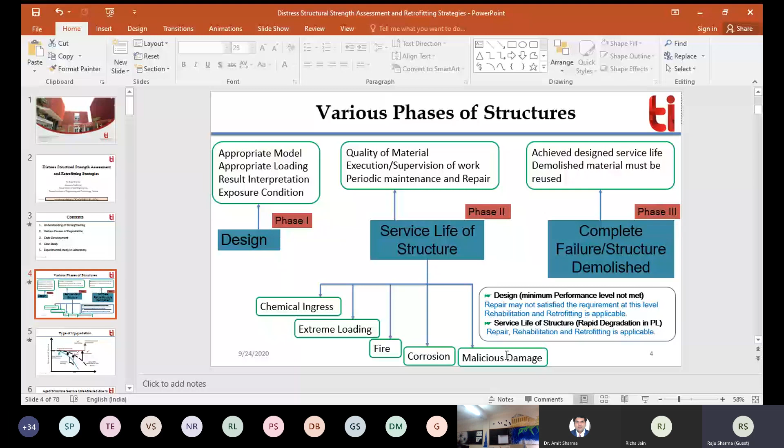Let me make my screen full mode. So here you can see that the life of a structure significantly depends on the quality of materials you are using at the site, the execution and supervision of the work, and periodic maintenance and repair. Sometimes you designed well and took everything good, but at the site the execution and supervision was not up to date, and because of that, whatever was the expectation from the structure was not met. This happens generally.

Because of these actions through the environment or other things, your rate of degradation rapidly increases. So in this particular phase, it is very important for the structural engineer to take care of the structure as required. Now next is complete failure, structure demolished.

It is good if your structure achieved its complete service life, complete design life. Then it is good. And nowadays sustainable construction practices and sustainable development goals are a priority for every nation.

So the demolition waste must be reused and recycled, because there are 17 sustainable development goals developed by the UNO, and it is the duty of all countries to follow them. More than 70% of them are related to the construction field. So it is our duty to use these materials in a beautiful way without compromising the structural property.

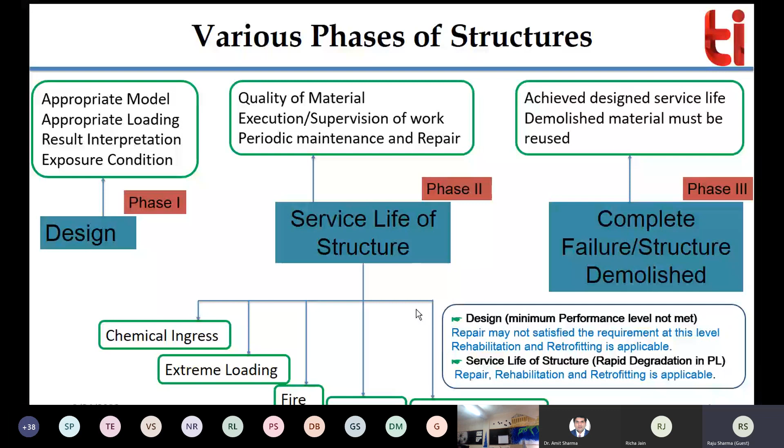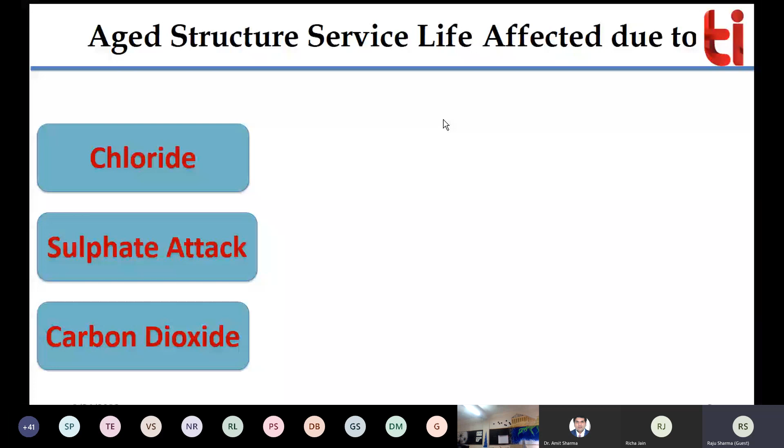Now we will see some aged structures which are subjected to service life, which are subjected to various kinds of actions like chloride, sulfate attack, carbon dioxide, shrinkage effect, alkali silica reaction, corrosion, improper construction practices, and other types of degradation. We will try to cover all these aspects, because as an engineer and retrofitting practitioner, you have to have the skill to identify the degradation first, and then based on that degradation, apply the cure to the structure. So we will discuss one by one.

This is the chloride induced corrosion map of India. You can see the blue line, which shows the coastal line of India at the bottom of this map. Just above that, you can see this line showing extremely severe conditions, on the right side top corner, that color showing extremely severe.

This coastal line is almost 7,000 kilometers, and many structures are constructed nearby this line. As you move above on the map, you will encounter severe corrosion, the area subjected to severe corrosion because of chloride. Moving further up is moderate, then mild, and then negligible. So at the top of this map, there is a negligible kind of environment in terms of chloride effect on the structure.

So structures constructed nearby the extremely severe zone need to be protected from chloride. Although carbonation also takes place there, effective carbonation may occur when you have humidity between 60 to 70%, and a temperature within some range. Then only carbonation will take place in this area, but chloride significantly affects it.

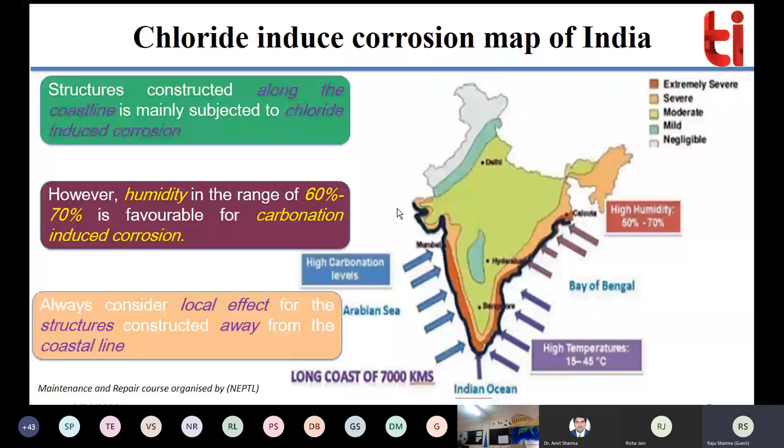Next is the service life of structure exposed to chloride. On the y-axis you can see the damage level, on the x-axis the exposure time. In the center you can see this particular member showing a concrete member, with the top surface intact with the atmosphere. So the chloride ingresses through the surface, and this red dot shows it transferring from the top surface to the black dot, which shows the reinforcement.

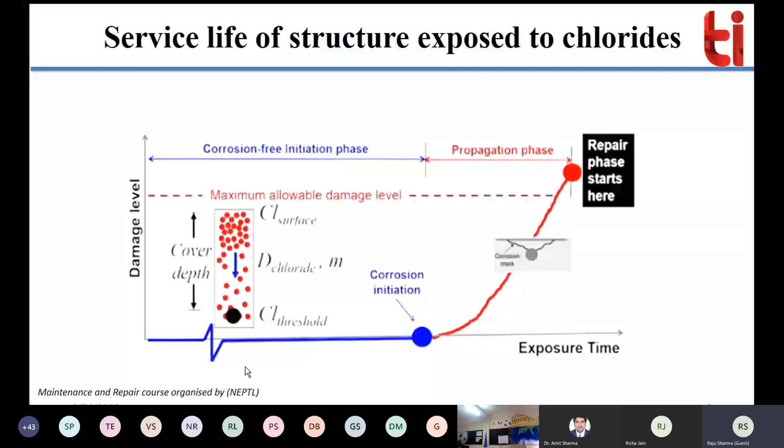When the chloride approaches the reinforcement and reaches the chloride threshold value, corrosion will start. On the x-axis, the blue line shows there is no corrosion, meaning a corrosion-free initiation phase. But once chloride reaches the threshold value, from that point the propagation of corrosion starts, and cracks due to corrosion may take place in the member. Then a repair phase starts from the point when it goes above the maximum allowable damage level.

Now this is the image. Just by seeing the image, it is very difficult to understand what happens. It shows that the concrete paste is completely removed, completely eroded, degraded, and some kind of appearance comes up on the surface, and this is not a pleasant look from the structure. So lots of aggregates you can see, meaning the cement paste is completely degraded and removed from there, and it happens because of the sulfate.

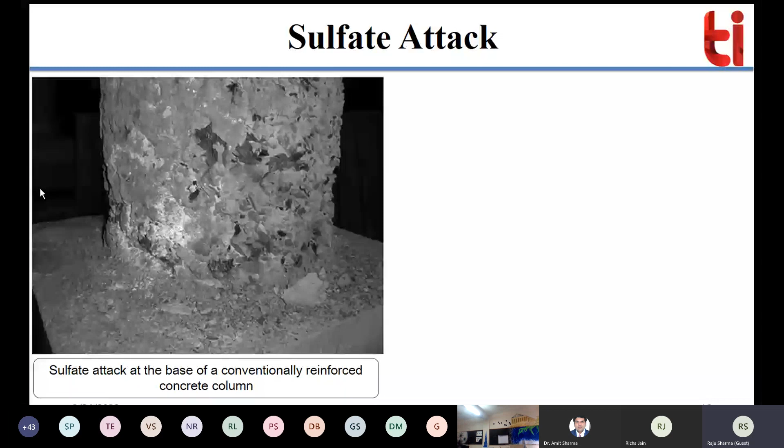To measure the sulfate, you have the ACI 318 building code for concrete which describes different levels of sulfate. Sulfate ions are present in the groundwater, in the soil, in the rainwater, and if the level of sulfate keeps on increasing, its effect on the concrete structure also keeps on increasing, resulting in spalling, cracking, degrading, and other failure. There are 4 types of different stages of sulfate described by the code: negligible, moderate, severe, very severe.

Now it is very difficult to identify the cause of this particular appearance on the structure. So what is the one method? I will tell you how you can scientifically evaluate this particular kind of degradation, how you can find out the reason for it. This is one method I will show you.

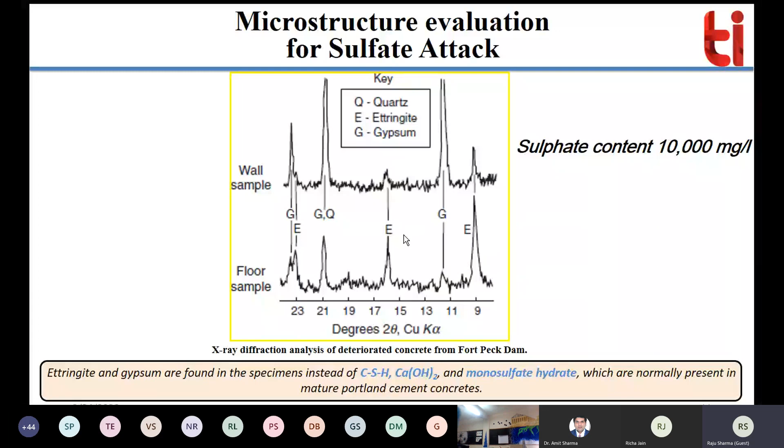In this particular concrete sample, you found those particular minerals which are closely associated because of the sulfate attack, because of the sulfate ions. It shows that your concrete is severely affected from the sulfate, and because of that, degradation happened on this wall and on the floor. So this is one way you can correlate microstructure testing evaluation with the large scale failure of the structures.

Now, next is the shrinkage effect. This is one of the important things. This image shows the surface having some cracks which are oriented in one direction.

If I say how this plastic shrinkage happens: if the surface area of the structure is very large as compared to the cross section, the surface is exposed to the atmosphere, the air, the sun rays. If it is too hot, the water starts evaporating. If the rate of evaporation of water is too high as compared to the rate of movement of water from beneath the slab to the top surface, meaning the bleeding of water, then the water will not reach the top surface appropriately, and the top surface gets dry. At that point the shrinkage starts.

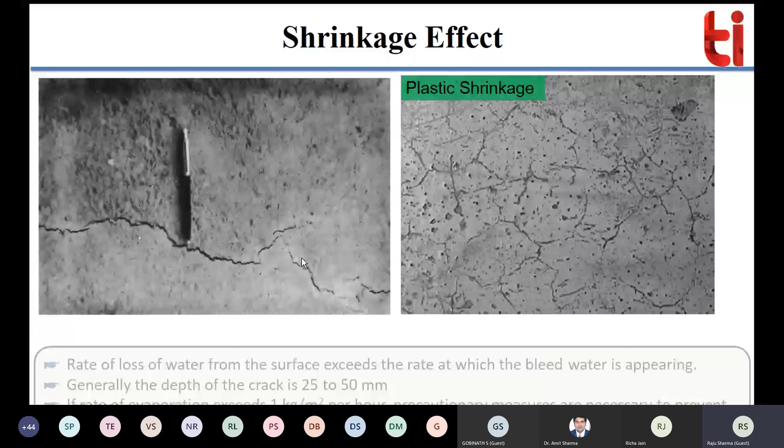If you see this closely, you can see this kind of cracks on the slab because of the plastic shrinkage. The rate of loss of water from the surface exceeds the rate at which the bleed water is appearing. Generally the depth of crack is 25 to 50 mm, and if the rate of evaporation exceeds 1 kg per meter square per hour, precautionary measures are necessary to prevent plastic shrinkage cracking. So this is the shrinkage effect.

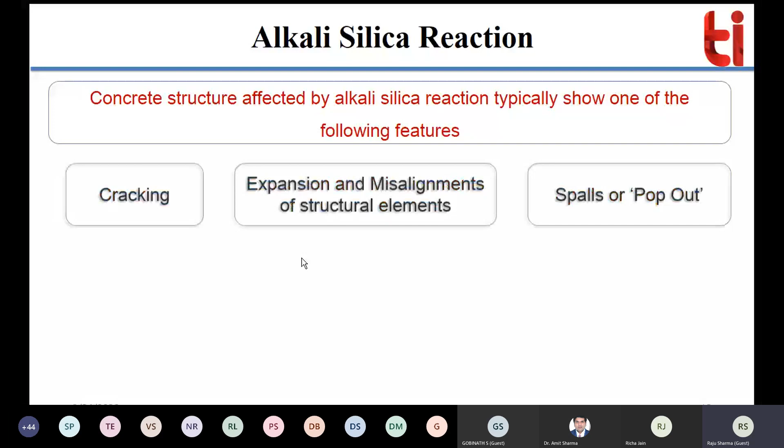Next is very important, the alkali silica reaction, which takes place in concrete structures because of the reactive silica present in the aggregates reacting with the alkalis present in the concrete. The following things may happen because of alkali silica: cracking may happen, expansion may happen, misalignment of structures may happen, and spalls or pop out may happen.

If you see the map, there is cracking formed on the surface, and it will be irregular polygons with boundaries reminiscent of political boundaries on a map, which generally shows map cracking. It shows the map, meaning a political map, on the concrete structure, which is what we call map cracking.

Unfortunately, all three of these effects are not specifically tied only to alkali silica reaction. Some things may happen specifically because of this, but simultaneously there might be other factors also which accelerate that kind of failure.

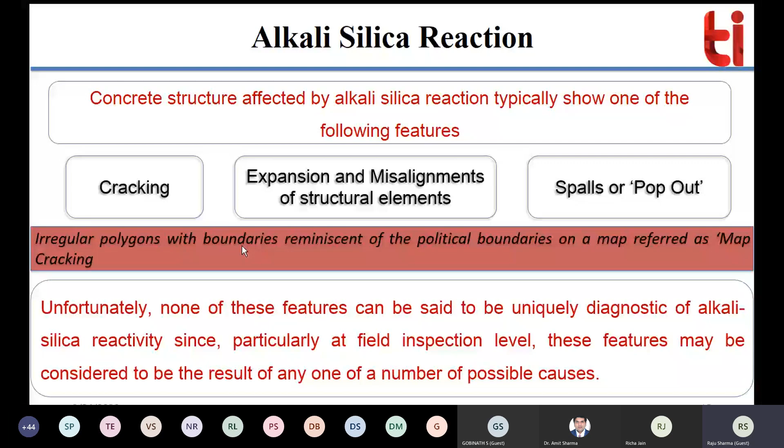I will show you one image of the floor, taken from Cape Town, and it shows a number of cracks which are randomly distributed and connecting with each other. It is nothing but a kind of random pattern on the slab, which we identify generally as map cracking.

If I show you this right side image, taken from the Mott MacDonald test exposure site, Devon, it is a column structure, and that column is not showing map cracking. Here is the map cracking, but here there is no map cracking. There is a vertical crack just propagating in the direction of the stresses, as this arrow shows.

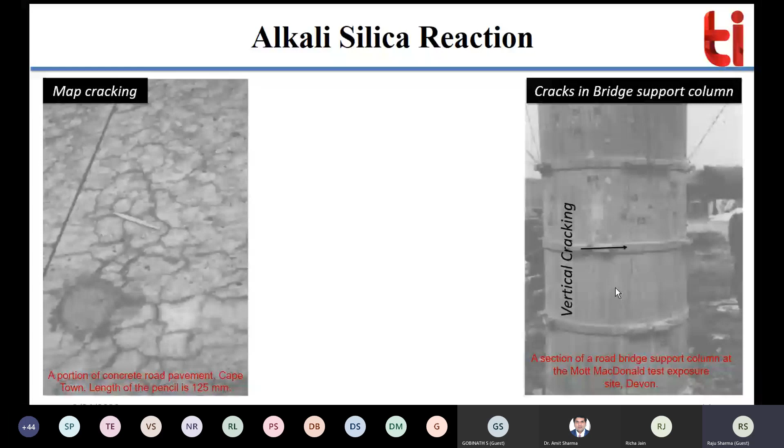Now if concrete is under pre-existing stress, if there is a stress applying on that particular structural element, then if that structure is affected by alkali silica, it may not create map cracking. It may create cracking which propagates toward the direction of the stresses. Now, what they did is they cut this particular section from the structure itself.

They removed this section so that the stresses acting on it were completely removed, and they placed that structural element somewhere else. Then they found that instead of cracking in the vertical direction, random cracking in a map-like pattern started to form.

So what does that mean? It means that if your structural element is not subject to stresses and is affected by the alkali silica reaction, that will create map type cracking. But if that structure is subjected to stressing, it will not create map cracking, but instead create cracks running along the direction of those stresses.

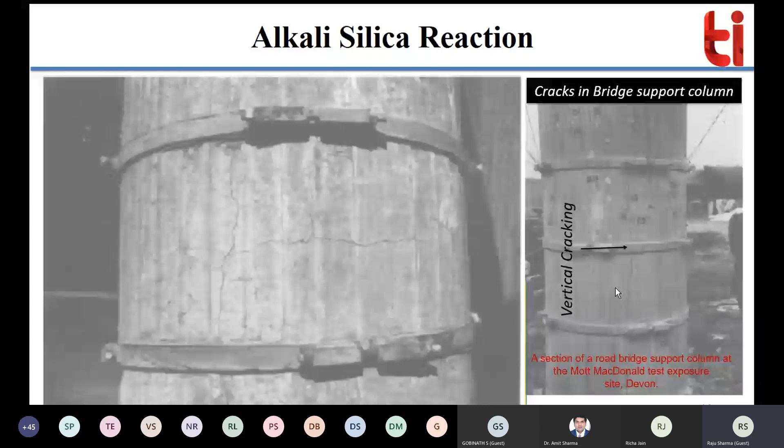So this is the difference between the alkali silica reaction identification types. Now this is the pop out. In the pop out, you can see this particular aggregate, shown in white color, and it just breaks because of the alkali silica reaction.

When this reaction happens, an expansive gel forms very close to the surface of the concrete, and that gel is very expansive. That creates pressure which keeps increasing and expanding, and then the pop out happens in the aggregate.

This is another image showing this aggregate. They found this is a category of chert particles which generally have high alkalis, and because of that, this kind of cracking may appear on the surface. So this is the alkali silica reaction.

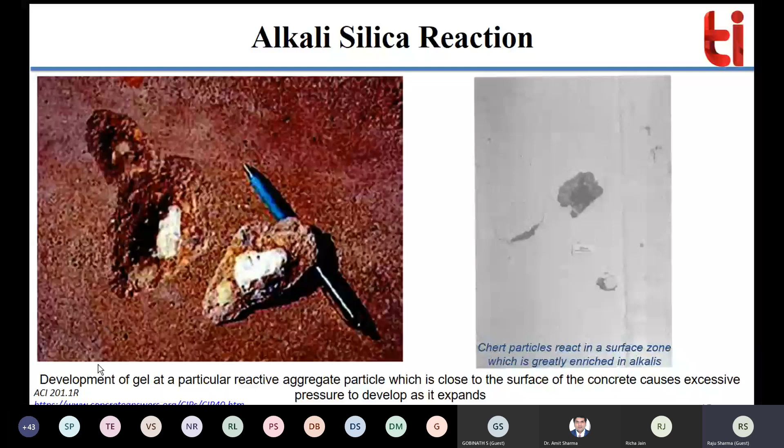Now we will see corrosion in the reinforcement. We will go through the basics first and then move to the advanced topics.

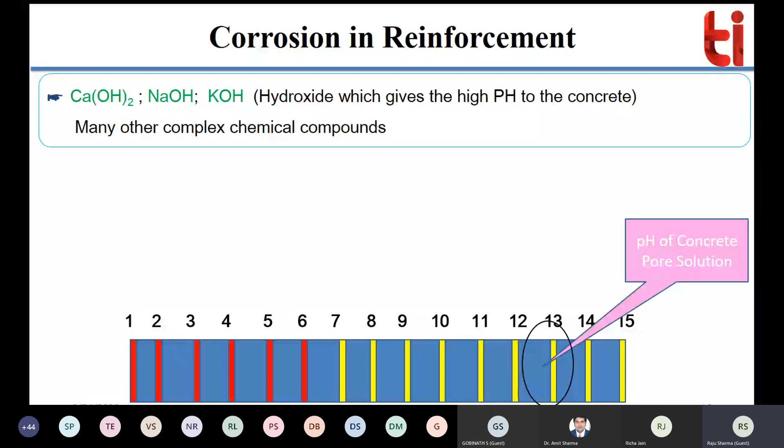On the lower side you can see the pH scale, showing pH values from about 1 to 15. Your concrete has many compounds inside, such as calcium hydroxide, NaOH, and KOH, and because of those compounds the alkalinity of the concrete is very high. If your concrete has high alkalinity, generally around 13, that is the pH of the concrete pore solution. If you measure the pH of concrete, it may lie near 13 to 13.5, and because of this high pH value, your reinforcement is safe inside the concrete.

Now let's divide these two terms: acidic and alkaline. Something happens in the concrete when it is in service, and because of that the alkalinity is reduced - that is basically corrosion. Corrosion takes place when you have oxygen and electrolyte in the concrete, along with chloride or carbonation. If something is not there, corrosion will not take place, but unfortunately it cannot be controlled that way. So the presence of oxygen, electrolyte in concrete, and chloride or carbonation creates corrosion inside the concrete.

That process actually creates the corrosion. What happens inside the concrete is that the pH value decreases towards the acidic phase, and if it goes below 9, corrosion takes place. That starts corrosion, and therefore corrosion occurs.

If I visualize this, this is the reinforcement, and under high pH value you have a protective layer, like a protective coating on top of the reinforcement. When the pH value decreases, this protective layer starts to diminish. Once it diminishes, the reinforcement starts exhibiting corrosion. So this is the basic fundamental process of corrosion.

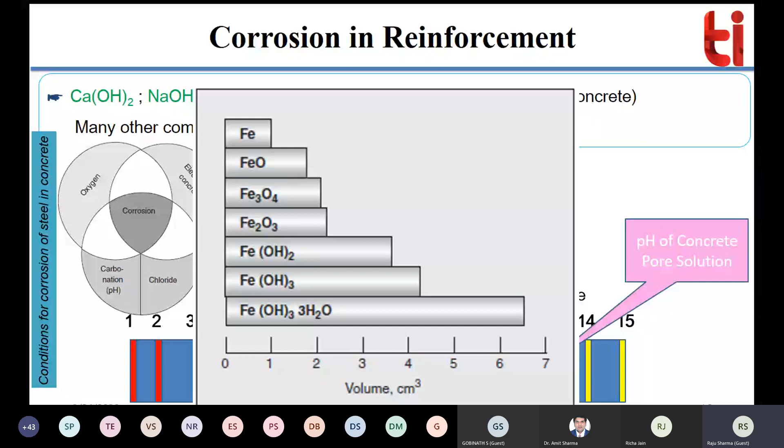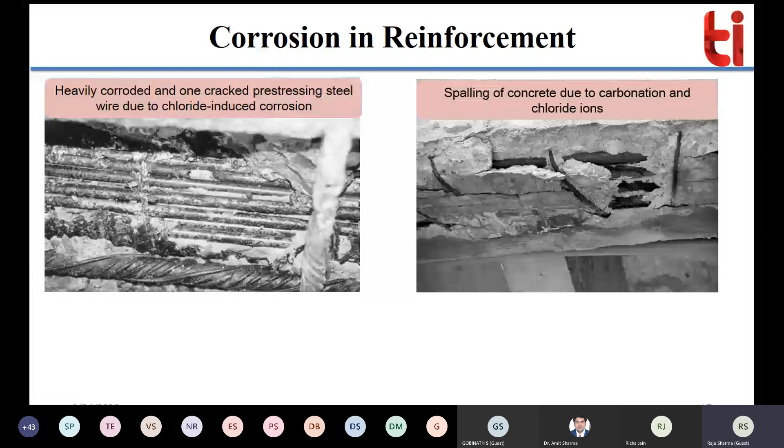Completely cracked, and it happens due to chloride-induced corrosion. And the second image shows spalling of concrete due to carbonation and chloride ions. This might also indicate improper construction practices - you can see the placing of the stirrups in this image, which is not appropriate. So we need to understand these two things: pitting, and this particular damage due to carbonation.

So in general, corrosion in carbonated concrete results in early cracking and spalling of the concrete, and it happens uniformly. But localized corrosion happens due to chloride ions - chloride ingress at a particular point - which affects the reinforcement from one location, reducing the cross-sectional area of that reinforcement.

If you see this larger image, you can see pitting corrosion on the left side, where this reinforcement is severely degraded. This reinforcement is related to pre-stressed wire - these are pre-stressed tendons. So in pre-stressed tendons, cross-sectional area loss has happened because of pitting, and you know this reinforcement is always under stress. Once it's always stressed, the reduction in cross-sectional area may result in brittle failure of the structure. So pitting corrosion must be avoided.

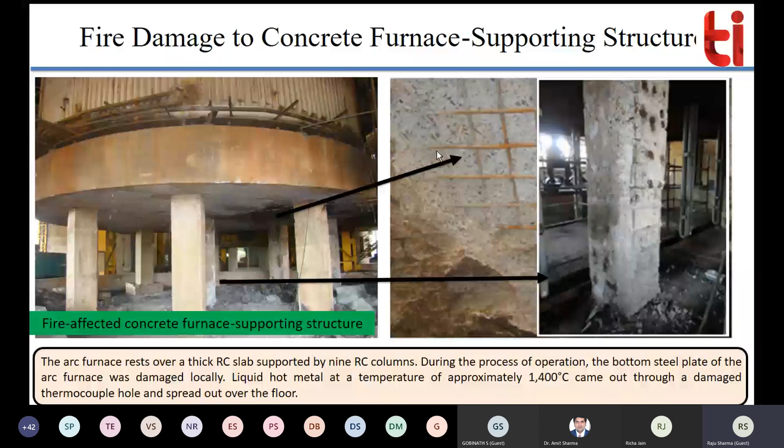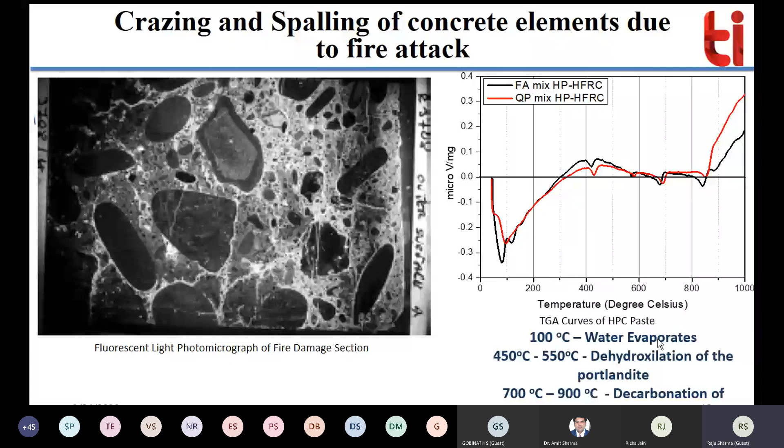As temperature keeps increasing, the main favorable compound of concrete, calcium silicate hydrate, will start to diminish, consumed by the fire. At that point, the binding through the cement will start collapsing or degrading. Because of that, your concrete may not perform well under fire, subject to the time range also. So these are the three stages we are discussing.

Now next is improper construction practices. Some general construction practices I want to discuss might be neglected at the site, but may affect the structure severely later on.

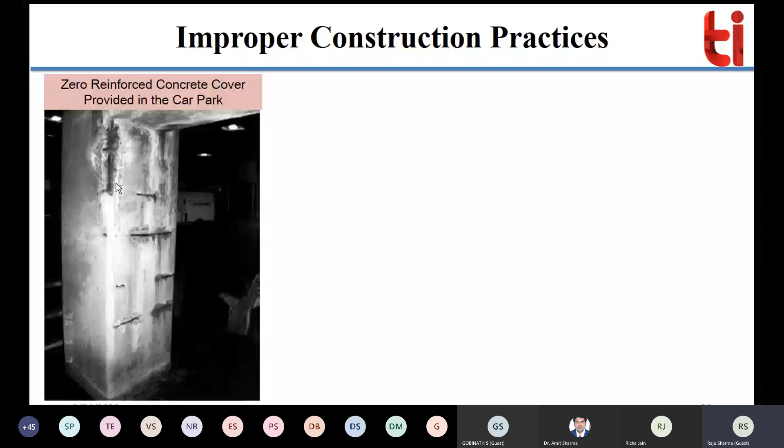This is a car parking space where the column is there, and you can see the reinforcement is severely corroded because it's exposed to the environment and there is no cover provided to this reinforcement. So this is included in improper construction practices.

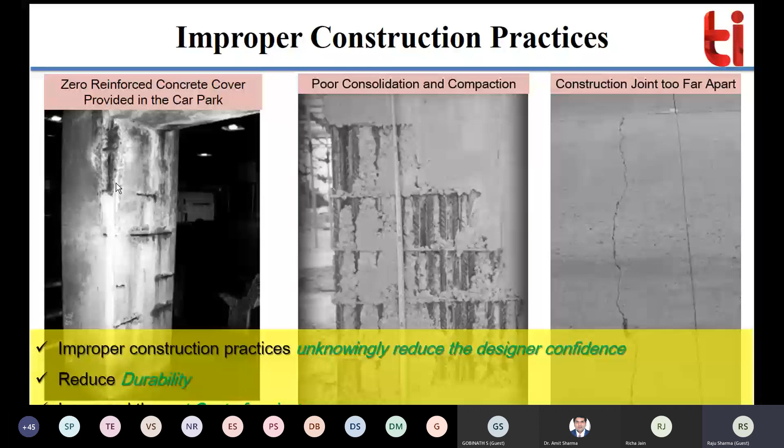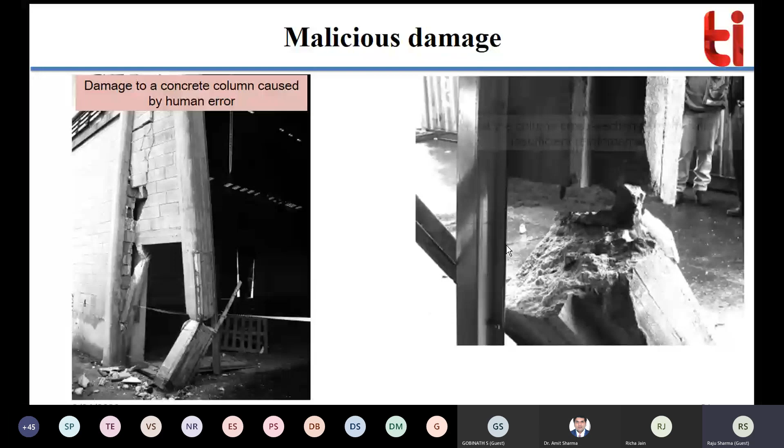This is the zoomed image showing that both faulty maintenance and unintended human mistakes, such as smashing of vehicles, are very frequent causes of damage in the majority of industrial and transportation concrete structures. This wall structure was caused by a truck that moved in reverse gear and hit the gate portal by mistake. You can see that the absence of minimum reinforcement caused the brittle failure.

Okay, so this is about the malicious damage. Now other types of degradation must be discussed, so that we can cover as much as possible, which will be good for you. So we will see honeycombing, which is very common at the site.

Sometimes this happens because of improper mixing, improper placing, improper vibration, or improper formwork, if the formwork is not tightly packed. The liquid, the water present in the wet concrete, may escape from there and the concrete may harden, giving a honeycombing effect. If you are not applying vibration properly, that may happen.

Next is medium scaling. Scaling shows the disintegration of particles from each other, so there is no bonding between particles - that is medium scaling. On the right side corner image, you can see there is a joint, and that joint shows a saturation line.

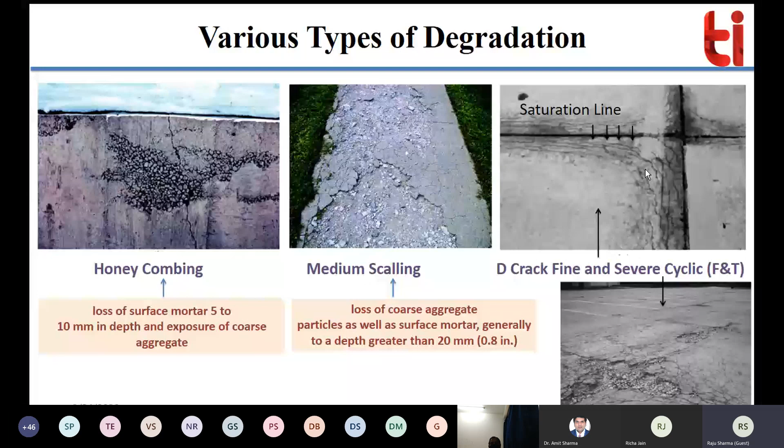So you have to take care, you have to identify the cause of the crack - this is a kind of assessment we are doing. In visual inspection, you must be able to identify the cause of cracks, whether from a durability point of view or because of loading itself. There are so many points to consider.

So this is some of the identification of cracks through overloading. Now, some of the cracks are in the building. You can see on the left side, this is the junction just below the floor level, just below the first floor level, or the top floor level.

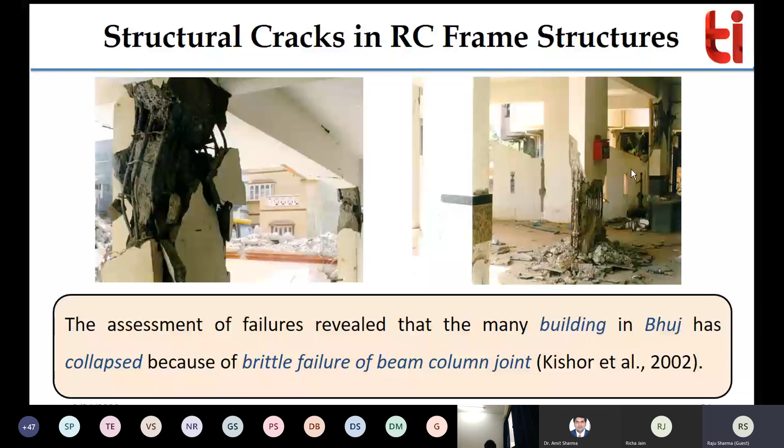You can see over here, the reinforcement is bulging, and this particular form happened during the Bhuj earthquake. On the right side you can see the failure happened at the floor level, and there is very poor detailing of the reinforcement. So the plastic hinge has formed just above the floor because of the poor reinforcement, and failure has happened there.

Now, the complete building may collapse. So this is the shear failure of a beam column joint under strong ground motion.

Earlier it was presumed that the joint is rigid, but later on, based on research, we found that there is some movement, so we have to work on the joint also. But initially there was no point of confinement.

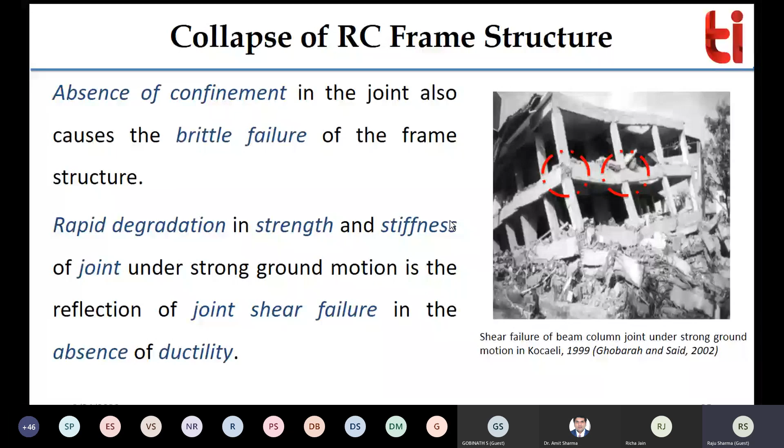Because of the absence of confinement, brittle failure may be observed in many buildings. So one building is made with confinement, another without confinement. Failure may occur in both cases, but the rate of increment of cracks, strength degradation, and strength and stiffness retention all depend upon the confinement level in the joint. So if confinement is completely absent in the joint, a rapid rate of strength and stiffness degradation may be observed, and because of that, failure may happen.

To do so, there is a philosophy that the plastic hinge should form in the beam rather than the column. By doing so, local failure may occur and sudden collapse may be avoided. You get large displacement at collapse, which means you are effectively utilizing the strength of each structural element against extreme loading.

How to achieve this? If the summation of the moment of the column at the junction is 1.4 times greater than the moment of the beams at that particular joint, then you get failure in the beam rather than the column. This is given in IS 13920, BIS 2016 code, which is recommended now in the codal provisions.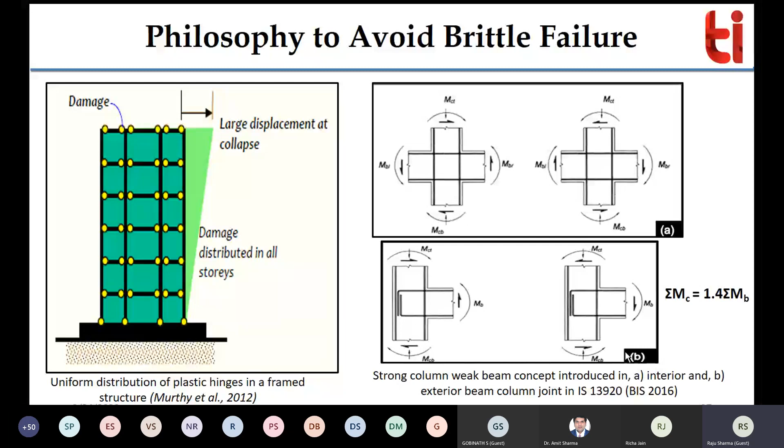Now, one important thing: when earthquake or other severe loading affects the structure, it is not necessary that all beams, joints and columns are damaged to the same level. The same level of damage may not happen in all buildings, it is not mandatory. The extent of damage may be different in different buildings, or in different floors, even in different columns on the same floor.

So when this happens, you, being an engineer assessing the building through physical evaluation, your understanding of the concept is very important. Along these lines, various codes have been developed, like ASCE 31, FEMA 356, ASCE 41-13, which help retrofitting practitioners all over the globe and bring them onto the same page for retrofitting practice.

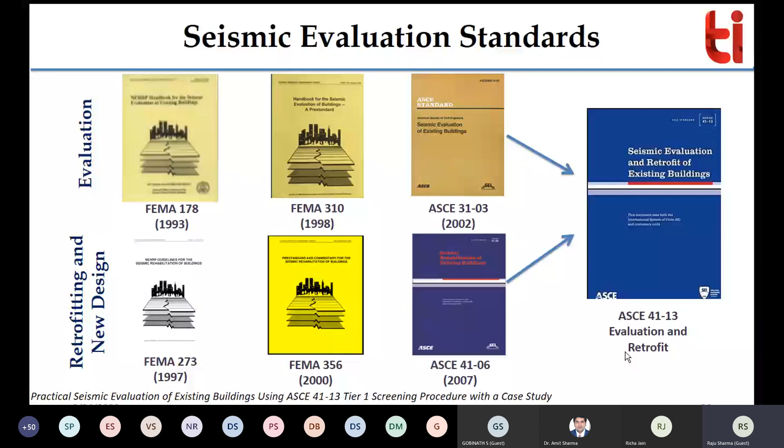Now we will see what ASCE 41-13 tells us. It gives you tier 1, tier 2, tier 3. In tier 1, it is general visual inspection, a quick identification of potential structural deficiencies. In tier 2, the deficiency observed in tier 1 will be taken care of, or a detailed tier 2 evaluation can be done. Tier 3 is a full, complete, detailed analysis for the building, and it can be chosen either after tier 1 and tier 2, or you can directly apply tier 3. It depends upon the client, how much they will spend on the system.

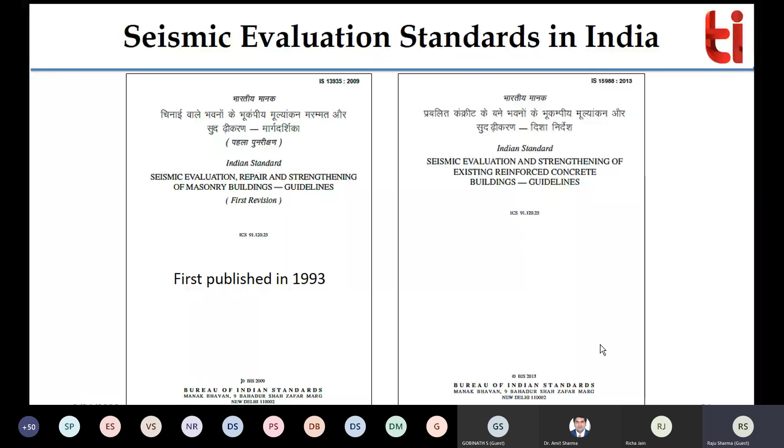In India, we have two codes: IS 13935 and IS 15988. One code relates to masonry building retrofitting, seismic evaluation, repair and strengthening. The other code shows the seismic evaluation and strengthening of existing reinforced concrete buildings. We will look briefly into what these say. IS 13935 gives us the selection of material guidelines and techniques for repair and seismic strengthening of damaged masonry buildings during earthquake, and damageability assessment and retrofitting for upgrading the seismic resistance of existing buildings, which can be covered as per IS 4326 and IS 13828.

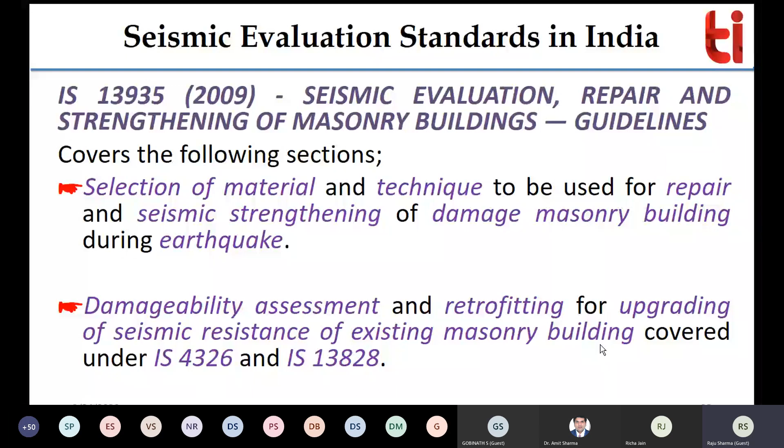Provisions of IS 13935 are applicable for buildings in seismic zones 3 to 5 of IS 1893. So no special requirement for building upgradation is required when they lie in zone 2. But important buildings in zone 2 may also be considered for upgrading their seismic resistance. These are defined in this particular code.

If you go with reinforced concrete buildings, that will help us reduce the risk of death and injury because of the damaging effects that may be produced due to earthquake. It provides a set of key steps and procedures for the assessment of the expected seismic performance of an existing building in the event of a design level earthquake, and wherever deficiencies are found, you can apply strengthening to that particular existing structure.

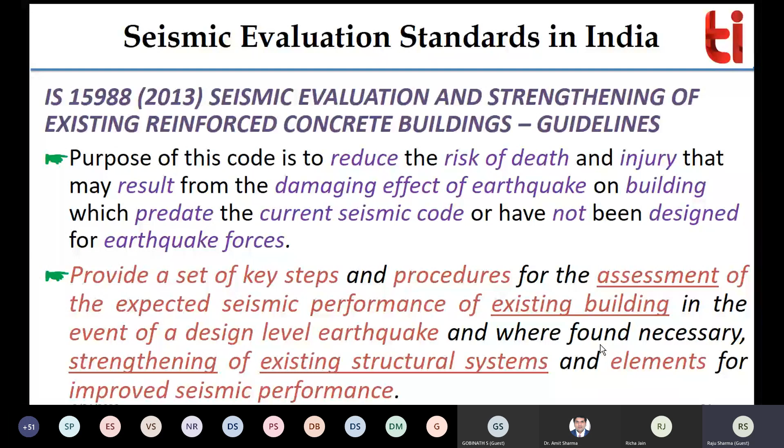These are some codes related to petrographic examination, CS-ES-1.7. AIJ is for survey, diagnosis and repair. There are some RILEM reports presented here for industrial floors, electrochemical techniques, and in-situ concrete combined non-destructive testing. These are some of the codes available for conditional evaluation.

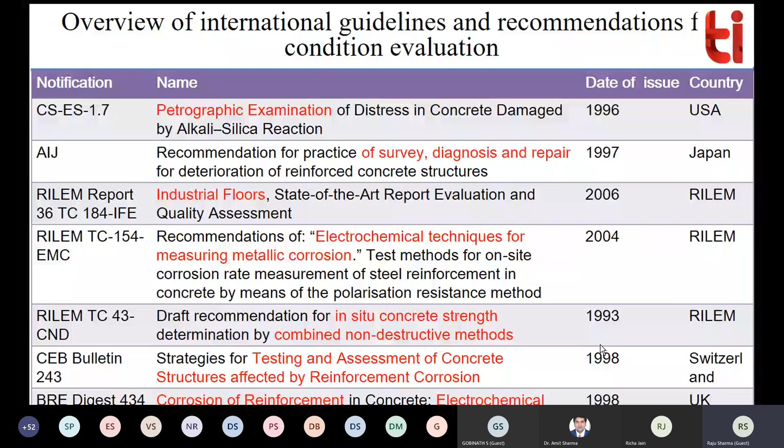Now we have a flowchart showing how we can conduct the evaluation methodology on site. First of all, you have to do a preliminary investigation, meaning you review the plans and relevant documents related to the building you are going to retrofit. Then you go for the visual condition survey with documentation of deterioration and distress. Then you can go with field and laboratory testing, and even preliminary analysis and evaluation. If it is satisfied, then you can move further in the process.

But if it is not satisfied, then you have to follow this process again. If satisfied, you have to decide whether rehabilitation is required or not. If it is required, you prepare the retrofitting strategy and all documents related to that, and then you can issue the final report. But if not, you identify special conditions to be further considered for maintenance and planning. So it is based on the engineer's experience, based on which he can take the decision.

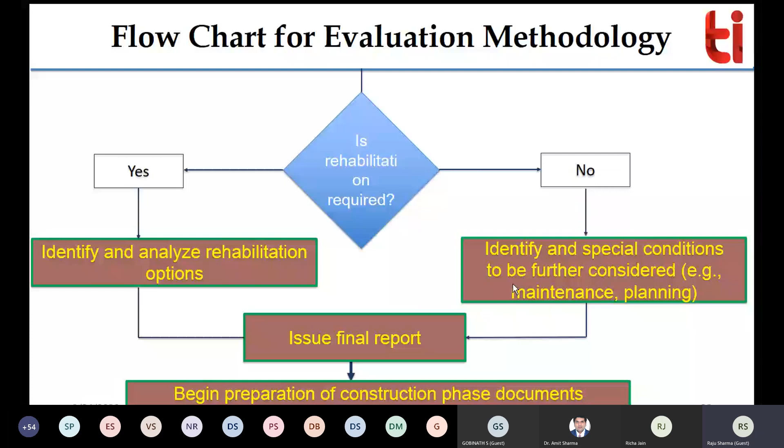We will see what passive and active strengthening are. Passive basically does not actively participate right after retrofitting. When the load goes beyond the nominal level, then these particular methods may initiate. But active strengthening, just after applying the strengthening, will take care of the loadings.

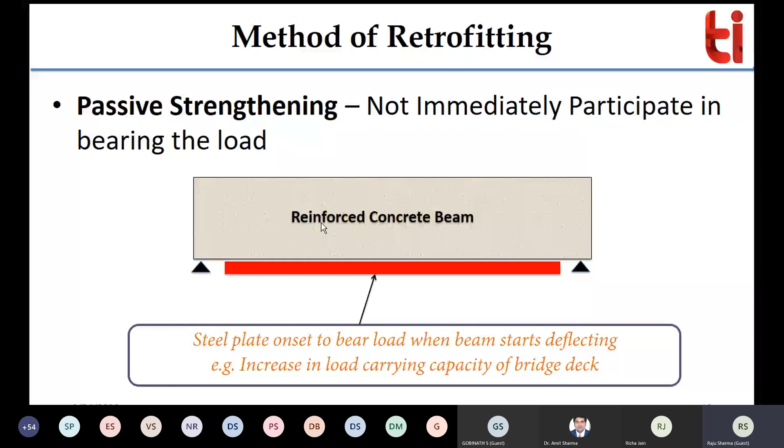Passive strengthening is generally wrapping of steel plates on the bottom side of the concrete beam. So when the load comes, the reinforced concrete beam can take care up to its maximum capacity. Beyond that, when the load goes beyond, the steel may take that particular load. That's why we call it passive strengthening.

If you see, the carbon plates are simply applied on this slab, simply wrapped on this slab. This is carbon steel plates, and on the right side you can see these steel plates being applied over here.

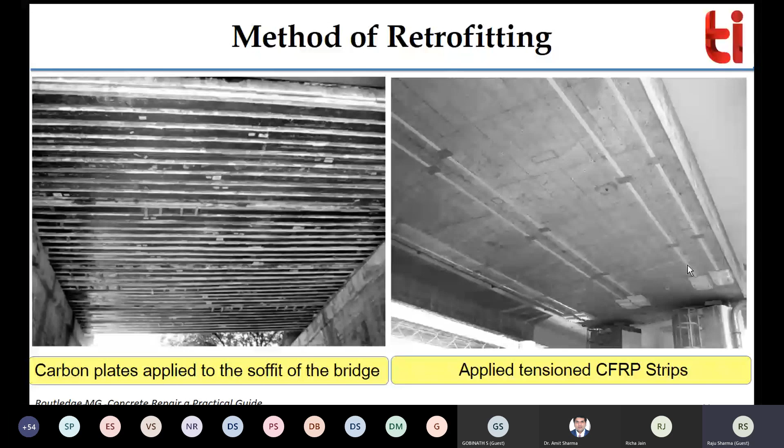These white lines you can see over here are pre-stressed CFRP sheets. We have tested the pre-stressed CFRP sheet in our laboratory also.

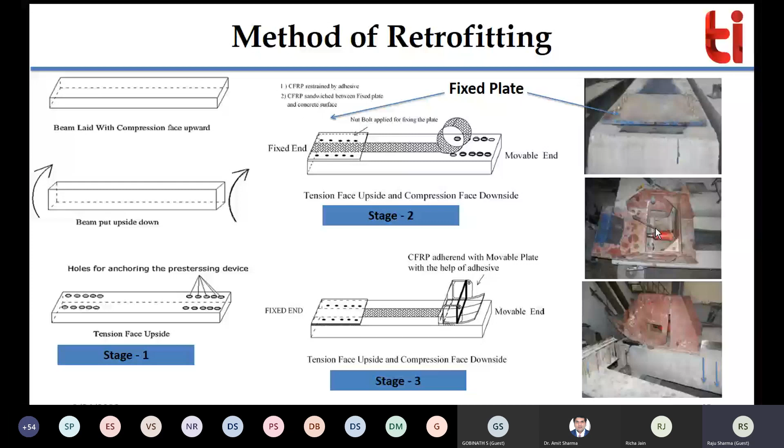Then we applied the loading. On the right side you can see we are applying the loading. There was a failure in the FRP, in the form of stirrups or strips basically, and you can see the concrete near-surface or cover surface is just stuck with the CFRP after failure, but the load deformation behavior is significantly improved after applying the CFRP.

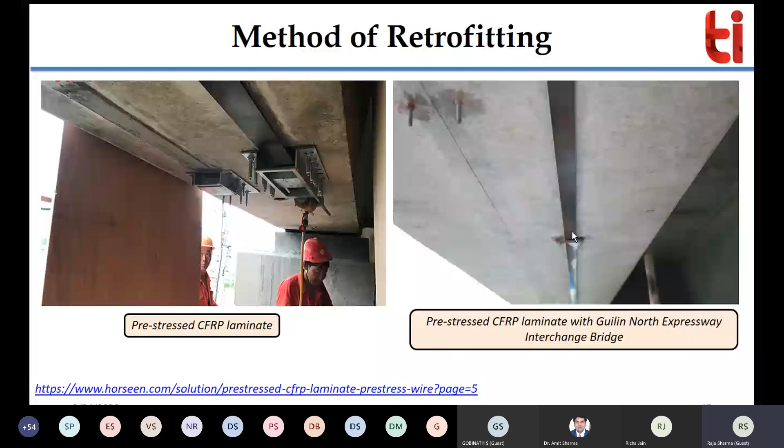This shows another method of doing the CFRP, another arrangement which you can see over here, and here we can see the CFRP strips. I will share with you a kind of video which will tell you about this particular methodology.

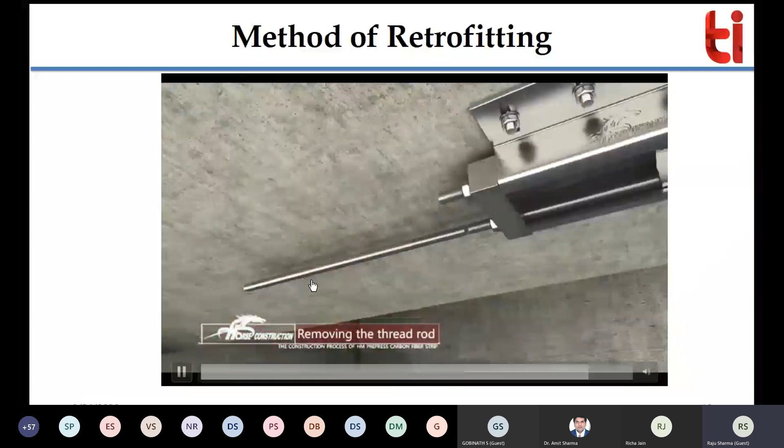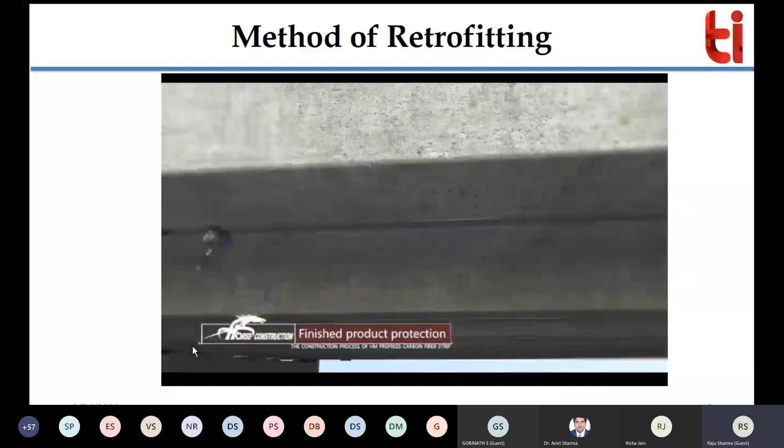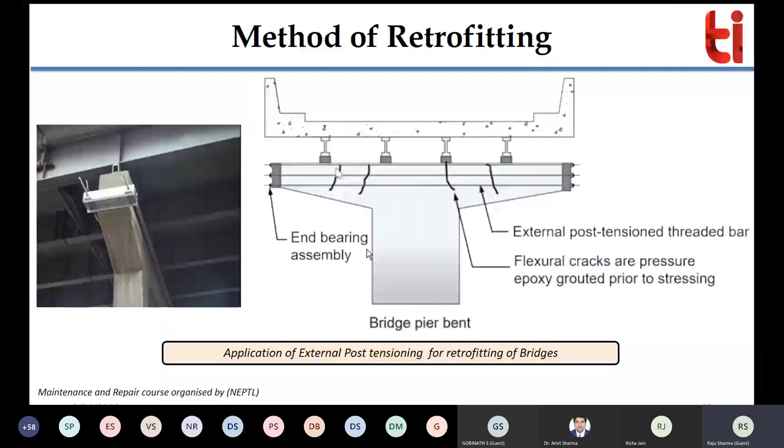One important thing: all these cracks must be treated before applying the pre-stressing, meaning epoxy grouting or something like that has to be applied in the bridges before applying the pre-stressing through the cables. This is another method by which you apply the steel plate: steel plate jacketing applied on the bottom of the bridge.

And which increased actually the flexural stiffness EI of the beam and of the bridge, and performance may be improved.

Next is the jacketing, which is a traditional method in which the section size is increased. You have to evaluate the new section size based on the demand and compare that with the capacity, and whatever new section comes in that particular area of concrete, you have to set the reinforcement and do the concreting over there.

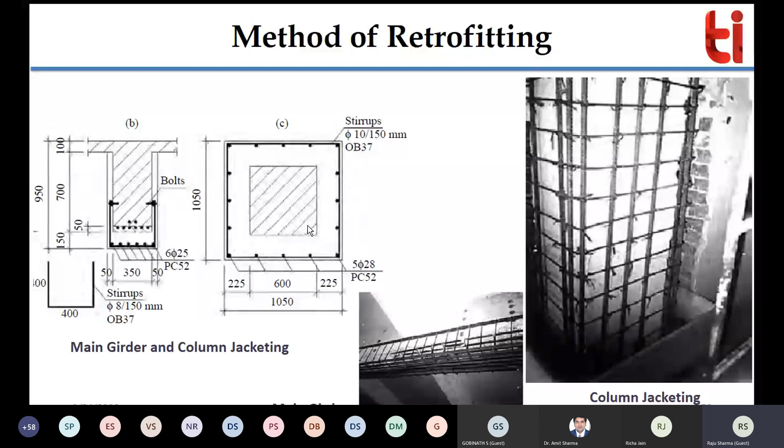Now the recently developed materials used in retrofitting include engineered cementitious composite (ECC), high performance concrete, ultra high performance concrete, and ultra high performance hybrid fiber reinforced concrete. Now we will see some case studies on this.

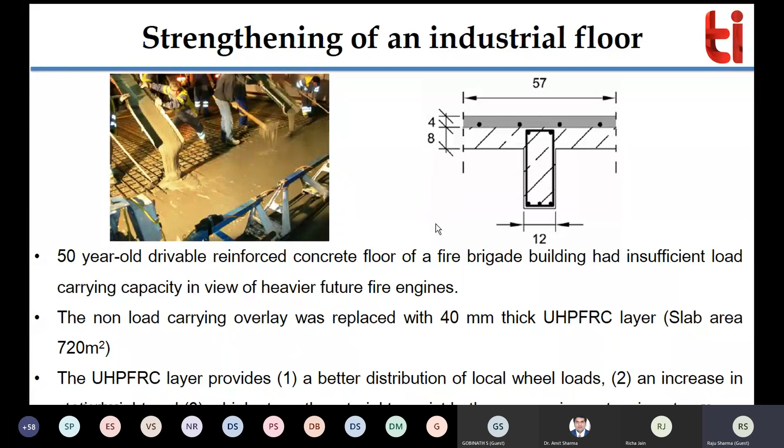This industrial floor actually got damaged on the surface because fire brigade vehicles were moving on this floor. So what they did is they layered the top core of the slab with ultra high performance concrete along with reinforcement, giving new thickness to the floor with ultra high performance concrete having a strength of more than 100 MPa.

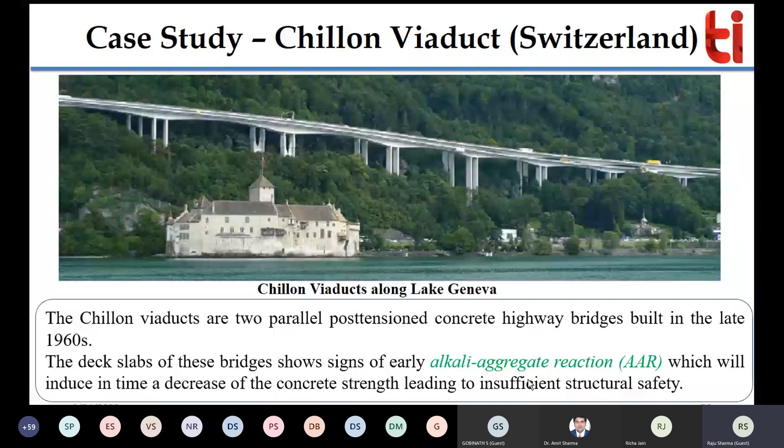It was built in 1960, and because of the alkali aggregate reaction which will induce in time, the performance degraded. So in that case, they applied the UHP HFRC on the top surface along with reinforcement, meaning the UHP HFRC overlay with reinforcement, as you can see over there.

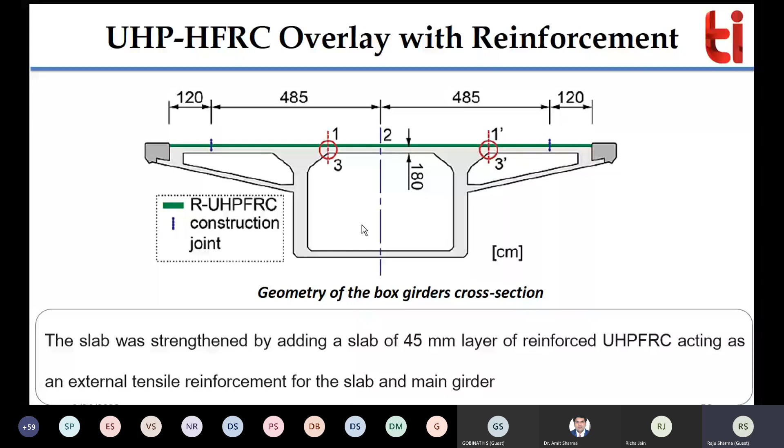So the new slab is laid with a 45 mm thick layer. In this image on the left side there is reinforcement, and UHP HFRC is laid on that. On the right side you can see the finishing of that particular slab.

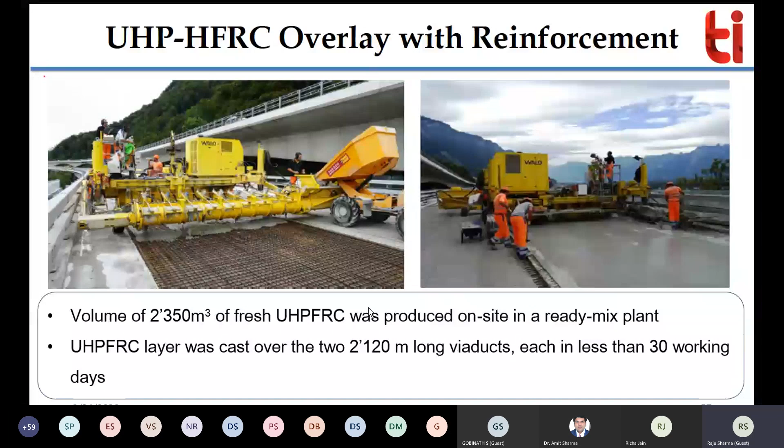The total volume was 2350, done with ready mixed concrete, and the UHP HFRC layer was cast over the 2120 meter long viaduct, each section in less than 30 working days. So they have done a wonderful job using UHP HFRC to retrofit the bridge deck.

So on the top surface you lay the UHP HFRC along with reinforcement, so there is a new resistance that exists because of this material, and we add it as VRU. VRU is the new resistance that exists because of the UHP HFRC.

So you can say there is a delay in failure that you get by using this particular kind of material, and your shear capacity will increase. So these are some of the points that I just explained to you.

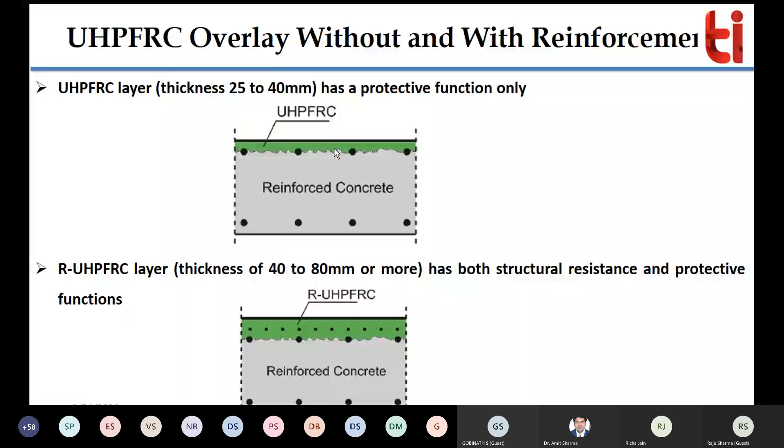There are two methods: one without reinforcement layer, and one with reinforcement on the top surface. UHPC can be laid without reinforcement, generally with a thickness of 25 to 40 mm. With reinforcement, the thickness is 40 to 80 mm. Once you use UHP HFRC with reinforcement, the performance of this material is very high compared to just reinforcing bars.

Ultimately, the performance of the retrofitted structures is completely improved.

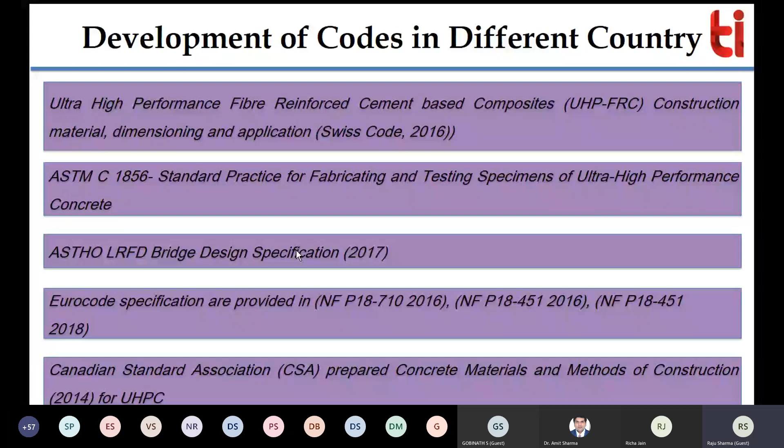Now regarding code development for UHP HFRC all over the world, there are several codes. First is the Swiss code, which is very detailed and explains things thoroughly. Next is ASTM, which is developed for testing specimen sizes - what kind of specimen size should be used for testing ultra high performance concrete. Then we have AASHTO, Eurocode, and Canadian standards related to UHP HFRC. So to date, these have been developed for applying UHP HFRC in retrofitting and development.

Next, I'll explain the third phase of this presentation, showing a study related to ultra high performance concrete that I conducted in the TIET laboratory. We studied the performance of a beam column joint retrofitted with an overlay of reinforcement using UHP HFRC.

We developed ultra high performance hybrid fiber reinforced concrete, and this concrete was laid on the damaged area of the concrete beam along with the reinforcement.

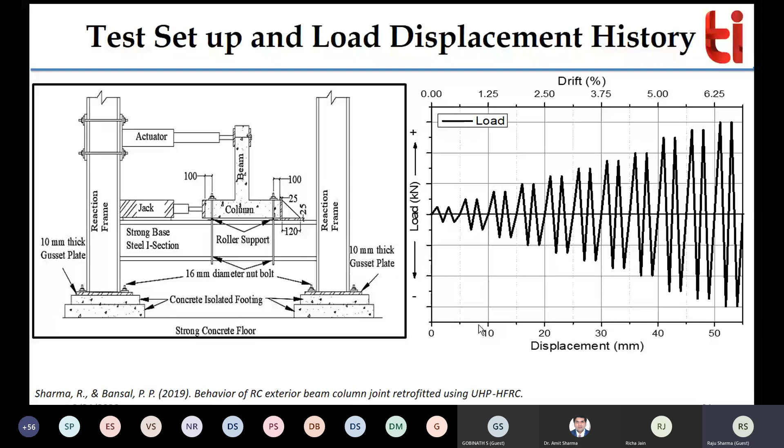The pattern of loading, the load history on the actuator, is applied in this fashion - equal magnitude load with 2 cycles. After 2 cycles the magnitude is increased, then increased again. This way we applied displacement on the beam, with each displacement having 2 cycles.

Based on the data we received, we decided on some damage levels to simulate actual site conditions, because on site, not all columns may be damaged to an equal magnitude. Some damage may be severe, some complete, some moderate, some slight. So we created those kinds of damages in our beam column joint.

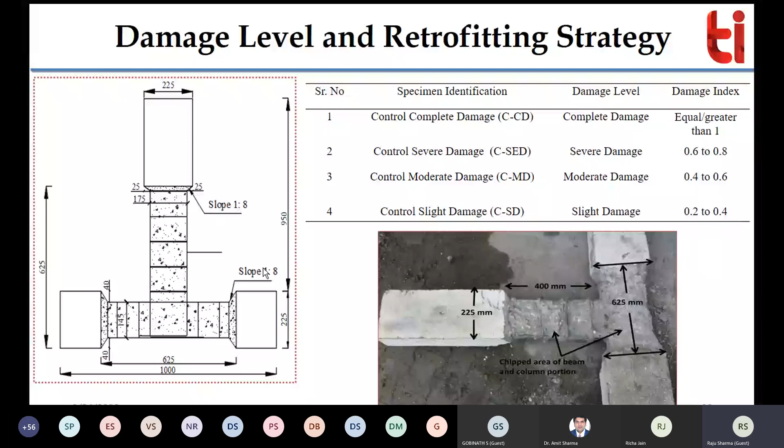That was the retrofitting strategy, to simulate complete damage, severe damage, moderate damage, and slight damage. We obtained complete damage, then severe damage, then by applying loading we got moderate damage, then slight damage. You can see the extent of cracks getting reduced as we apply lower levels of damage.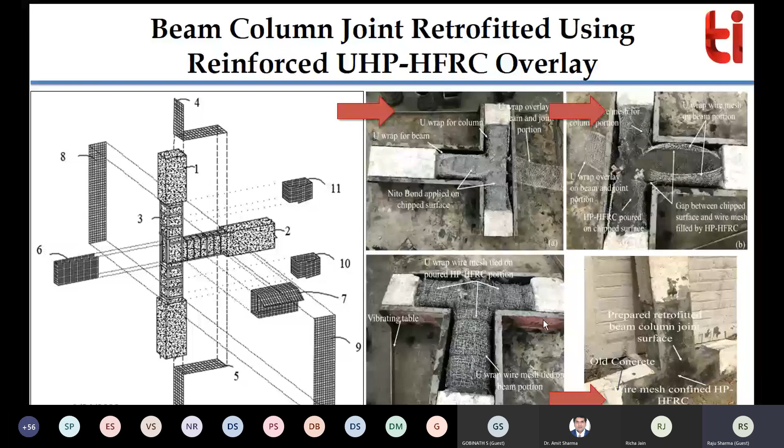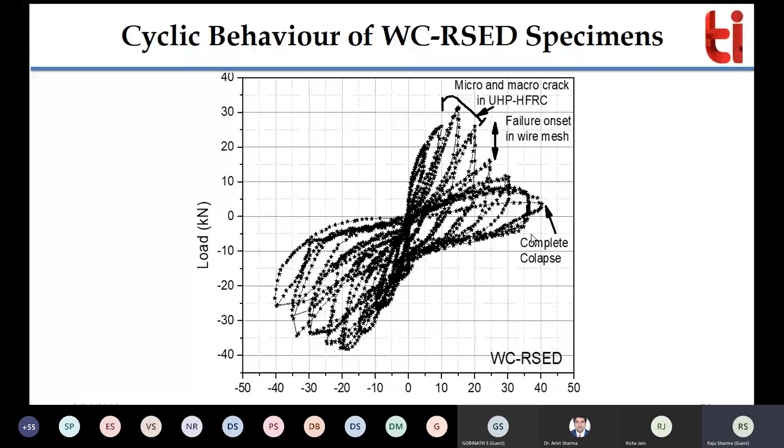Then for slight damage and severe damage, the wire mesh retrofitted severe damage specimen shows load capacity increased up to 30 and displacement capacity increased up to 40. This increased compared to the previous one as you decrease the initial damage level. For moderate damage level, RMD retrofitted, you got higher load peak capacity of 35 kilonewton and 40 displacement.

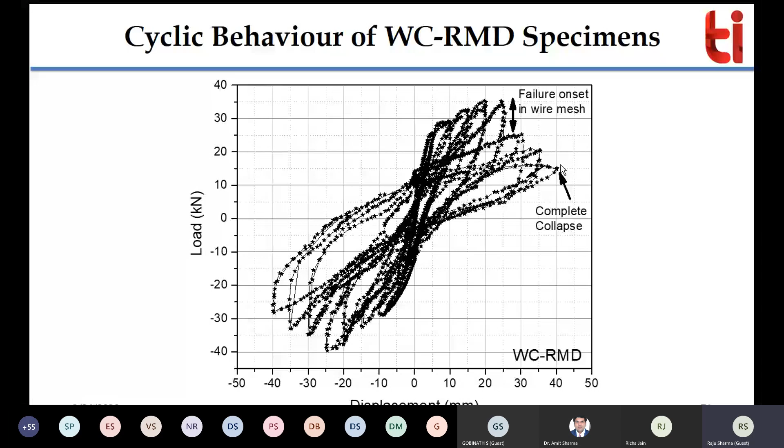This should be labeled RSD, I apologize for that error. RSD shows maximum load capacity nearby 40 kilonewton with 45 displacement capacity, and you can see the wire mesh failed somewhere over here. We got complete failure near 45 displacement, and the residual strength in the specimen is approximately 9 MPa. This is what we got from the testing, and this is the failure pattern observed.

Many cracks were initiated in the control specimen in the joint face also, starting from the interface of the beam and column and propagating into the joint area. But here you can see only negligible cracks occurred in the joint area, meaning plastic hinges formed on the joint itself.

As decided earlier, the design philosophy says rather than failure of the column or joint, failure should occur in the beam phase to get local damage rather than global damage. This retrofitting strategy is able to convert global failure into local failure in specimens which were not designed and constructed as per the latest code provisions.

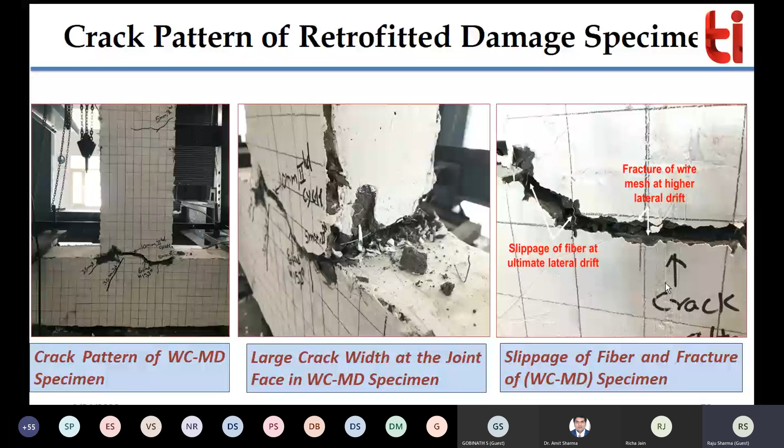You can see the crimped hooked fiber in the second image, and the fracture of wire mesh at higher lateral drift. There is also failure of the wire mesh, which actually provides confinement, and that would be the reason for the complete failure of the specimen. So this is the kind of cracks we got from the specimen.

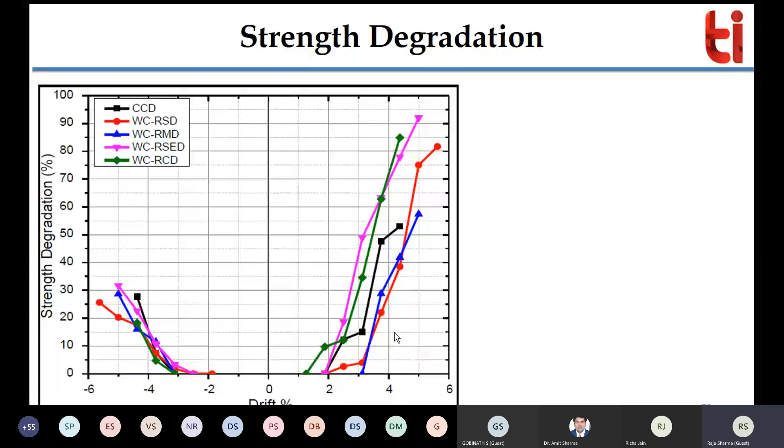You can see the slope of the line is decreasing. If you compare the specimens, the slope of this line decreases further. If the slope of strength reduction decreases, the structure can bear a higher magnitude of earthquake in a better way. So the slope of strength reduction gets reduced as the damage level shifts from complete to slight. The effectiveness of fiber and wire mesh in the post-elastic region results in a lower rate of strength degradation and helps the structure perform in a ductile manner.

What we need is ductility from the structures, because structures designed without following earthquake guidelines and ductile detailing may survive under gravity loading, but once an earthquake occurs under lateral loading, there is a need for ductility which controls the strength degradation with the increase in magnitude of the cyclic earthquake. So once ductility is improved, post-elasticity is improved.

Your concrete after the first crack can lengthen the failure up to a maximum displacement. So if you can lengthen the path of your material after the crack, meaning in the post-elasticity you lengthen the curve, you can achieve ductility, because ultimate displacement divided by yield displacement gives you the unitless number which is our ductility. As this increases, your ductility increases.

Now next is the energy dissipation. As I told you, energy dissipated in the soft story through one point, so local failure is observed from that point only, and the whole building collapsed.

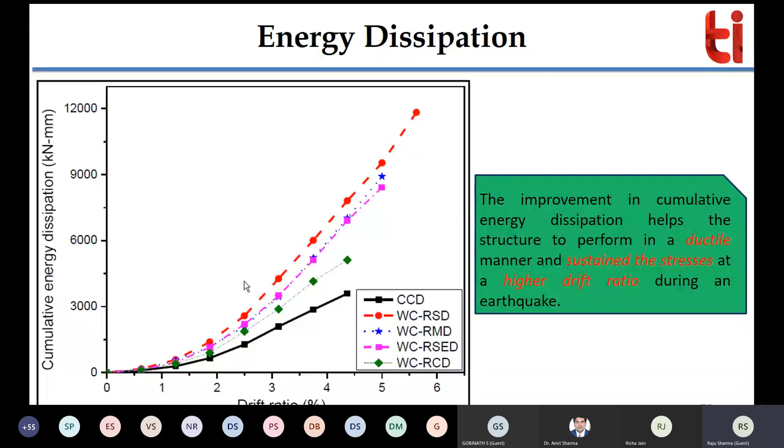So this is about today's lecture, all right? And over to you, Amit.

Yes, sir. Please ask any questions if you want. Sir, I want to ask a question.

Sir, how can we pre-assess the corrosion inside the existing concrete analytically? Yes, there are many papers available on the internet where they have developed models to measure the rate of corrosion. That is available up to some extent, not exactly, but yes, there are some methods available in which you can see the history or initiation of corrosion inside the concrete. There are some testing available also by which you can measure the corrosion rate.

Okay, sir. Hello, sir. Yes, please. The maintenance, in the sense, the other plumbing and heating and ventilation are there. Especially the plumbing, the corrosion, how does it take place, sir? In the building where the ventilation and windows are there. Plumbing, sir, plumbing. Then how does the corrosion take place? Can you please repeat your question? Especially water lines, corrosion is happening. How can you prevent it, sir?